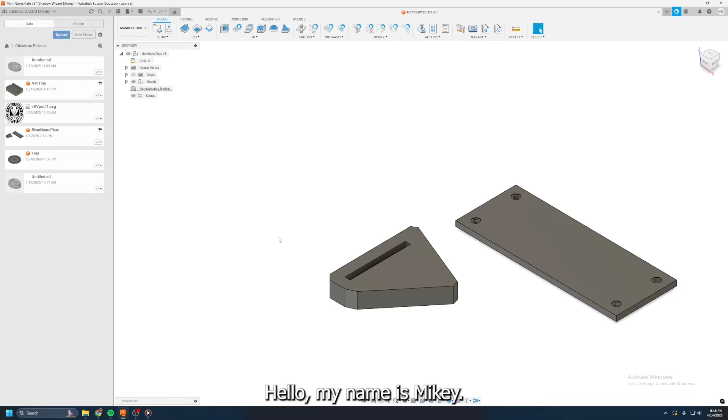I am head of manufacturing in the year 2024, and I figured it would be in the robotic team's best interest to create a comprehensive video guide on making things on the CNC within Fusion 360. This tutorial will assume you have a basic knowledge of Fusion 360 - you can speak to most people on the team if you need to learn more. Hopefully in the future we'll have other ways of using the CNC besides Fusion 360, but for now,

this is the best option. So to begin with, we are going to start with our basic model. This is a model that I made for my mom for Christmas. I never actually gave it to her, but at this point Christmas has long passed,

although some of the videos you'll see later, it is currently Christmas. This will be... you can see this is the stand that this part slides into. How it would really look like is this:

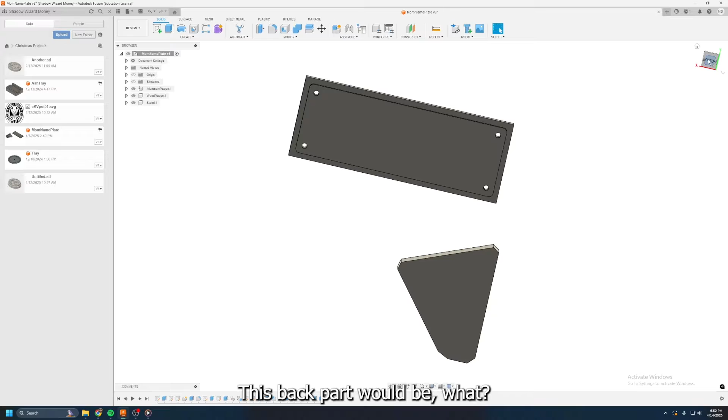this front part would be metal, this back part would be wood. For the most part, we use aluminum in the shop for the CNC, and any wood will do. This will also be wood over here as well, and it'll slide in there. I'd typically make two of these and make them mirrored, but for this tutorial, I'm just going to be doing one.

So the very first thing you have to do is from this design part up here, go down to manufacture. This opens up a new menu that you have to use to do all the manufacturing functions that you need to do. The very first thing is, if you ever see me open this up, you press S. So I'll just type in manufacturing and you'll see 'create manufacturing model'.

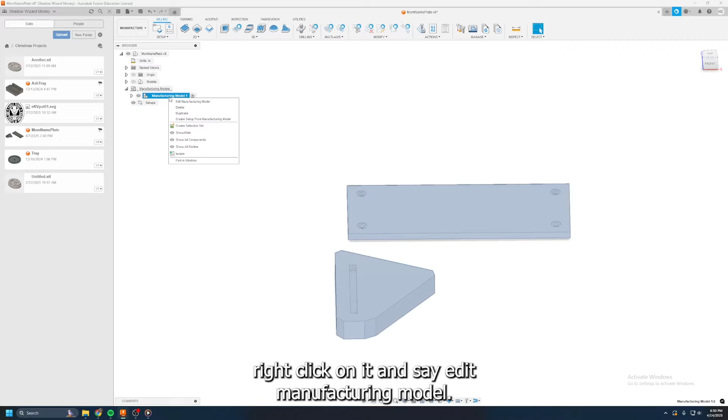So if we do that, I can right click on it and say 'edit manufacturing model'. A manufacturing model is basically just think of it like a separate model from the design one that you'd see up here - not design, manufacturing model. It is just a specific model, like a change in the model that you just use for manufacturing, although keeping the orientation for design might be easier to keep it in normal orientation.

In manufacturing, you can change the orientation, so I'll just show you what that looks like. Of course, we cannot have this metal plate under the wood and manufacture that - it's going to be really annoying if we were to do that.

So I'm just going to grab the aluminum - actually, it's on the same axis. Yeah, I'm going to grab the wood plaque, move copy, and just shift it over here and make it level. I think it's 0.25 off, or 1.25. Yeah, all right, we're good.

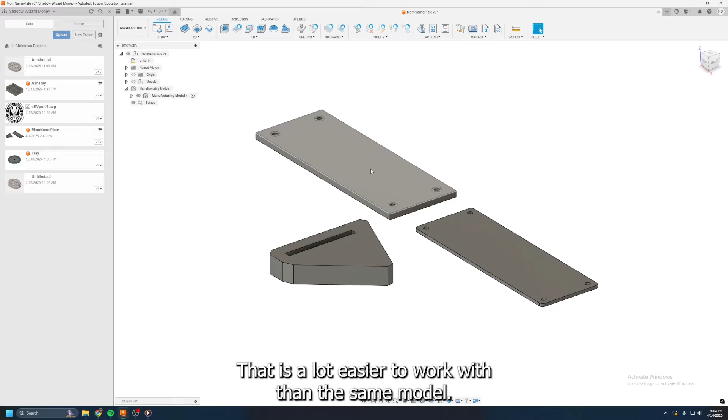So from here, now we have a finish edit. Now we have a manufacturing model that we can work with that is a lot easier to work with than the design model. Now what I'm going to be doing next is creating a setup.

A setup is basically just a set of information that we use to do functions on the CNC. This sounds very strange - just know that it's like precautionary things that we do beforehand, all right? Just click on setup and it'll bring up this menu.

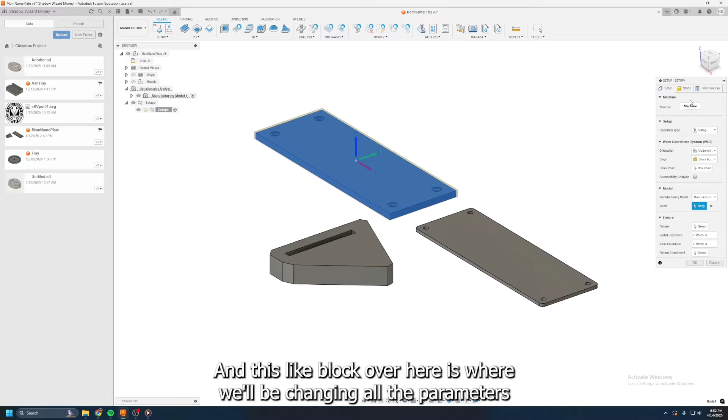Basically, this initial big square here is where it is assuming your stock to be. So what I'm just going to be doing first is this wood piece here, so I can click on model, click on that. This block over here is where we'll be changing all the parameters for the cuts - you may refer to them as cuts or mills. Same thing with the actual bits on the CNC, where I can call them a mill or a bit - they're the same thing, really.

Most of these things you can ignore, but this work coordinate system basically involves where we set our zero point to be. I just know the general way that our CNC is oriented, and we always want to have the x-axis and the y-axis on the same plane, going this way, always in one of the corners. You can kind of change the rotation of it, but it's not worth it in my opinion - let's just keep it as it is. Keep it simple, stupid. Keep it up here.

And now if we look at how this stock - again, the stock is the material that we're cutting out of - Fusion 360 is assuming that our stock is going to have this little extra bit that we want to cut off.

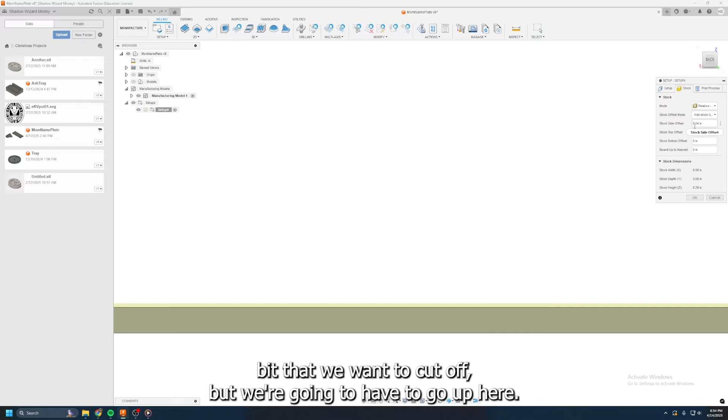But we're gonna have to go up here. I want to say no, we do not have any extra. So the stock top offset we have set to 0.0. I can set this to 25 and it will go up accordingly.

But the side offset is good at 0.04. All this really means is that once our CNC is zeroed, which you'll see later, it's just going to move 0.04 inches this way and 0.04 inches down before it actually assumes where it's cutting. It's not that big a deal. Yeah, this is all you have to do for setup.

Now that we have our setup completed, for this tutorial we're really going to be doing 3 big effects, or functions, in cutting them, in milling the stock or whatever it is.

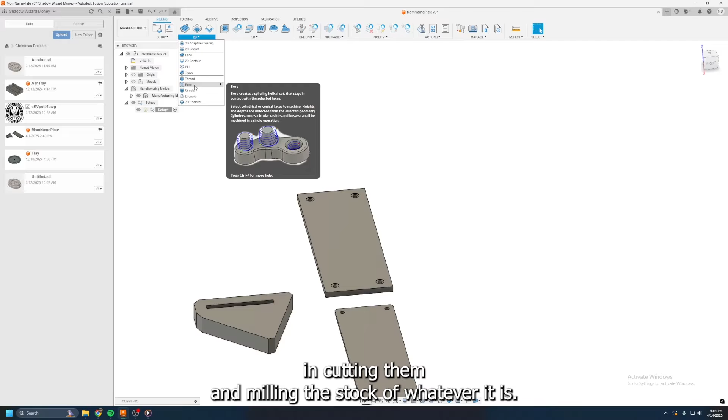The very first one is bore, and bore is almost always first, because if you imagine a piece of wood on the CNC, we need some way to secure it down to the board so that when the bit is spinning, it does not flick off pieces, like the whole thing, because there's nothing keeping it to the board. So what you typically see done is screws going up and down this way.

That's fine, but what happens if you have to go around a part that cannot be attached to any stock? Well, then you're going to have screws within this piece itself. So we always start with what is known as these holes.

As soon as you press 4, you'll see this menu open up over here. I have a document called CNC Speeds and Feeds. This is the main document I refer to whenever I'm cutting anything, which contains all of my speeds and feeds. I'll likely attach this in the description down below, but I know for plywood it's 180 inches per minute.

The feed is basically the distance that the bit is moving, versus the speed, which is how fast the bit itself is spinning. And if you don't know, RPM stands for rotations per minute. We're not going to go into detail exactly, I just want to have this up.

For right now, I'm going to do the next very important part, which is selecting our tool. So if you click on this tool, nothing will pop up because it doesn't know what's there. I have stuff in my local library, but let's just say that you are completely new to this.

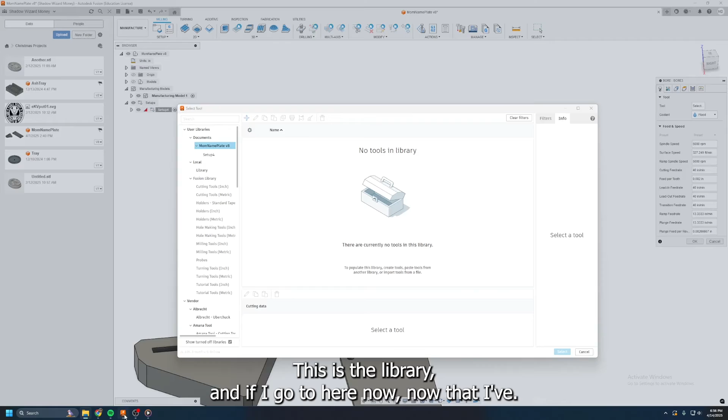I have also attached in the description below a library full of tools. So I can download this, it'll be in downloads. This is the library. If I go in here, it's basically a text file that contains information about all of the different bits, so that you do not have to manually import them yourselves. So now we can just right click on this, import tools, library tools.

Great, this is everything. This is all we're going to be using. In fact, we're really only going to be using this bit here, 4mm 50 OAL. Select that, 4mm 2 flute, 50mm. Great, making sure nothing's off.

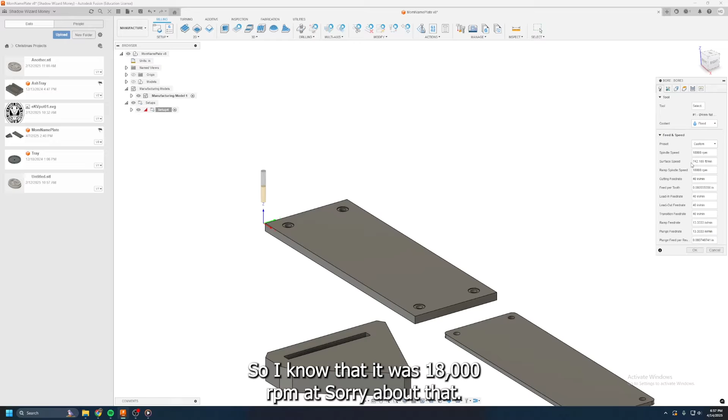Now that we have our bit selected, it'll pop down here, and we can enter in the speeds and feeds that we saw. So I know that it was 18,000 RPM at... sorry about that, for our speeds and feeds, sorry, I had to go change something.

There was nothing, I just went to check that I was not insane. Select that, that's the right tool, as I mentioned before. Looking at my speeds and feeds document, I know that this is 18,000 RPM at 180 inches per minute. Everything else will adjust accordingly. Those are really the 2 main ones that you have to enter.

Next, we can go to geometry. This is actually when we select the parts of the cut that we want to be cut. So I know that it is just going to be the circles. We can do this pretty easily.

Select that and that. This little yellow line is the path that the drill bit or mill is going to take. Select all of them. There's ways to automate it using these down here, but for the most part, I'm just going to auto select them.

Now, heights are basically just involving at what point you want it to operate.

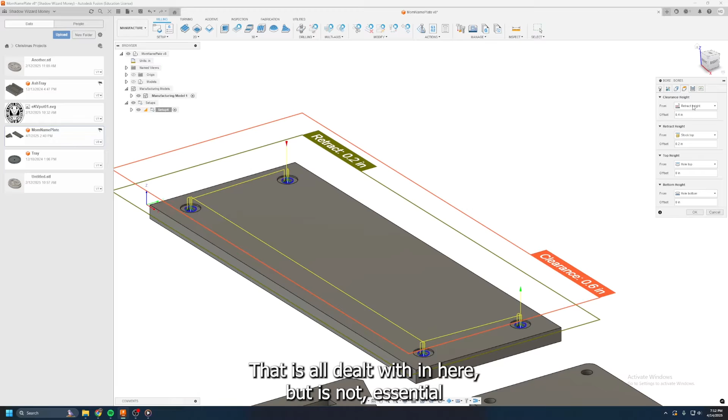When your CNC is moving, how high above the stock do you want it to go? And when it's retracting after a cut, how high does it want to go? That's all dealt with here, but it's not essential for the cut we're going to do.

For passes, we don't have to do a lot for the bore option, so we'll keep that as it is. Now that I know everything's correct, I can just go. Great, that's our first function done.

You can see the effect it has on the stock. It will automatically cut it out, you'll see. We can even simulate what that would look like if we right click and go to simulate. Here we can drag through and go through the actual path that it takes.

Next, we're going to be doing the contour. Now that we have our hole done here, we can drill the holes in to secure it, and now we're going to go around it with contour.

Just as before, we have our 4mm 2 flute, OAL 50 OAL. I can just click on the bottom. The top - do not click on the top. If you click on the top, it will cut down to the top, which means it will not cut at all. So you have to click on the bottom.

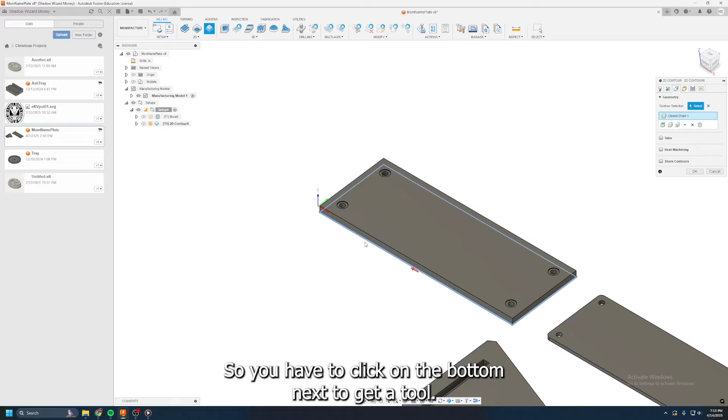Next, we go to tool. I should have done tool first, but it doesn't matter the exact order you do it in. It remembers the choices I made last time: 18,000 RPM at 180 inches per minute. That's about all I need, I don't need to change anything else.

However, I do want to go to passes. This is a very important thing called multiple depths. Think of our drill bit - it could maybe do the entire depth at once, but it's best and easiest on the bit for it not to cut the entire depth of the wood at once. So we can do multiple depths, where it will do steps downward as it's cutting.

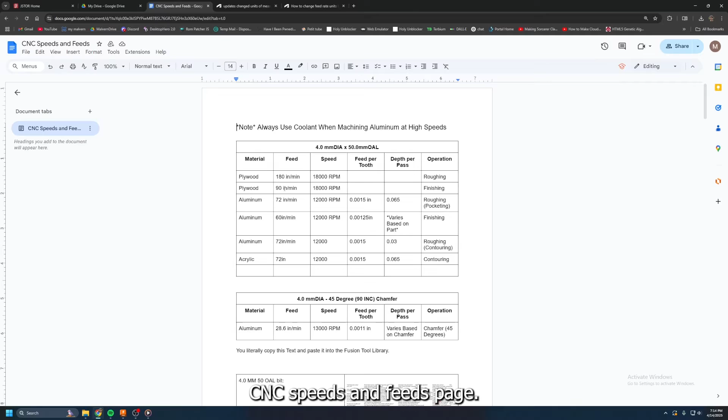So I can go back to my CNC speeds and feeds page. Our depth per pass is 0.065, which I can just type right in. Not a lot else to change here - we know what the tool is, we have the right tool, we have our right speeds, and we're good.

Look at that, you can see the different steps - the little blue lines are the steps it would take. If I select both of these, I can right click and go to simulate, and then see the entire thing from start to finish. Right around after it finishes these holes, like right there, then it would drill the material down to the bottom and then cut around. You can see how that would look.

Great, so I'm pretty confident with that piece, but that's just wood. It gets increasingly more difficult when you do anything with aluminum. If you don't know, aluminum is extremely soft, which makes it easy to work with, but that also means it has a low melting temperature.

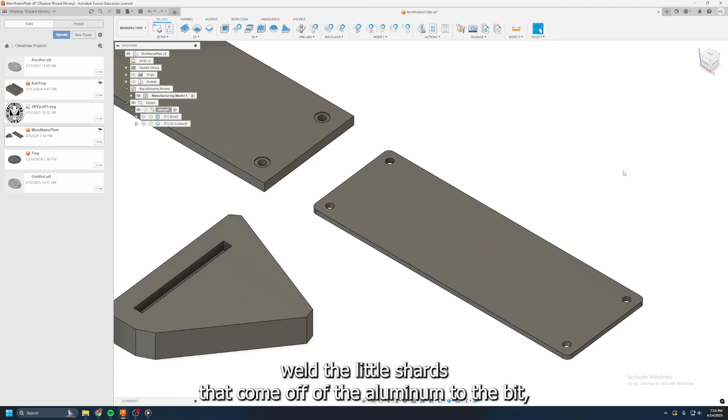So if you have something moving incredibly fast, causing a lot of friction, it will create a lot of heat, and it will effectively weld the little shards that come off the aluminum to the bit, which puts a lot of strain on it and breaks it many times. There are many other precautions you have to take to prevent this, especially on the CNC, mainly regarding where you zero. You don't want to zero too low down, or too high, and you'll see what that looks like.

You also want to have the sprayer on. There is a way to do a sprayer setup in Fusion 360 that we don't really use. I'm just going to do the exact same thing as last time, where you go to setup. It will automatically select that because it assumes I'm continuing with that, but I'm going to say no, I'm going to work with this. And then go to stock, and then relative size box.

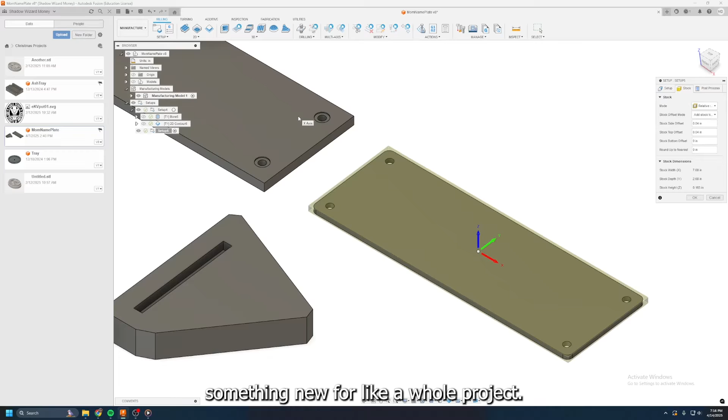It will default to relative size box when you're clicking on something new for a whole project, but if you're doing something specific, like going from this model to this model, you're going to have to reset it to relative size box.

I know that I want 0 top offset, because I know that where I want to zero it, I do not want to be any higher than where I want it actually to be zeroed. Great, I'm going to put my 0 point up here.

We're looking good. So from here, we're going to do the same thing that we did last time with a bore. I'm going to start off by selecting my different holes. And I know, just off the top of my head, I know that I have to go at 12,000 RPM.

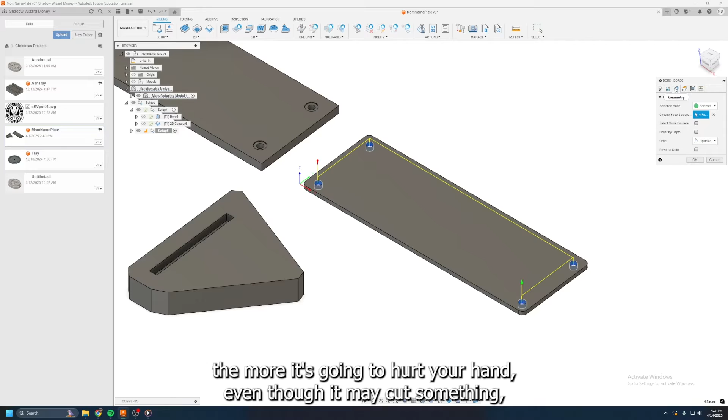Yeah, 12,000 RPM at 72 inches per minute. So it is much slower on aluminum because it is harder. You don't want to speed up on something that's harder. Sounds kind of counterintuitive, but it's just how it is. I think if the harder you press down on like a knife, the more it's going to hurt your hand, even though it may cut something, you know? That was probably not a great analogy.

Just go with it. Passes, we're not going to change this at all. And that's our bore done.

Now we're going to go to contour again. Select the bottom face as always. If you don't know, this little arrow in here dictates if we're going to be cutting on the inside or outside of a contour. We're going to be cutting on the outside. I've had to adjust that a few times, and it's happened in the past.

We're going to go to this. It automatically knows our speeds and feeds because I just entered it the last time. But in regards to passes, multiple depths are imperative.

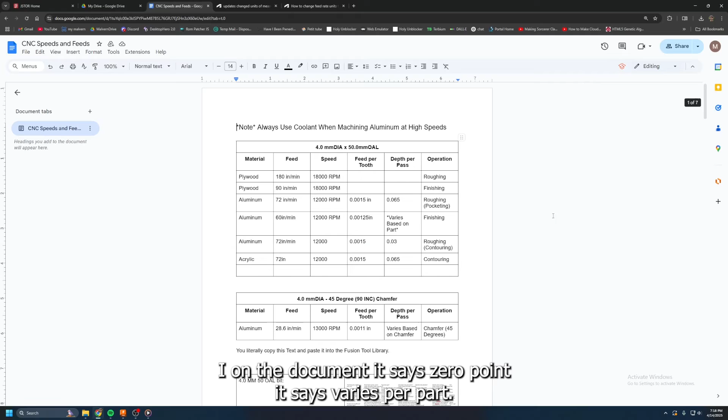On the document, it says 0. It says varies per part. I'm going to tell you that most of the time I've had the most success with 0.03. It is going to be very small, but it's going to be successful. And that's really all we can ask for.

In case I haven't explained this, the step downs are just how big the jumps are from height to height. So the distance from here to here, that is the step down. I mean, this looks like a pretty solid part so far.

So aluminum, we will get into a lot more later. Now we're going to go to our last little part here. We're going to be dealing with adaptive clearing, where in order to utilize it, the best way to do it is to select the very bottom.

You'll see it has pocket. Like I can even do contour, and that'll also, or chain, I guess you call them, but whatever. Select the very bottom. I'm going to go to tool.

I know that I'm going to be going back to the wood speeds and feeds. So that's 18,000, should be at 180 inches per minute.

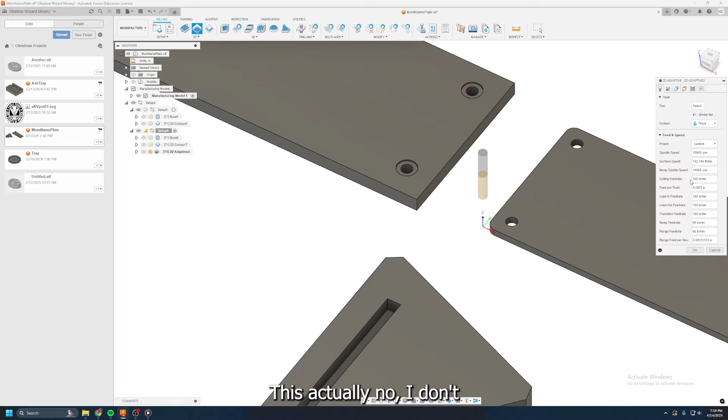Actually no, I don't deal with tabs yet, but this part is quite simple. There's not a lot of change with this.

Oh wait, no, I did not create a new setup. So it will do that if you do not create a new setup, and it will be unusable.

But I'm just going to speed through this. Our top offset is 0.0 with our 0 point set at the top corner. Now we do adaptive clearing.

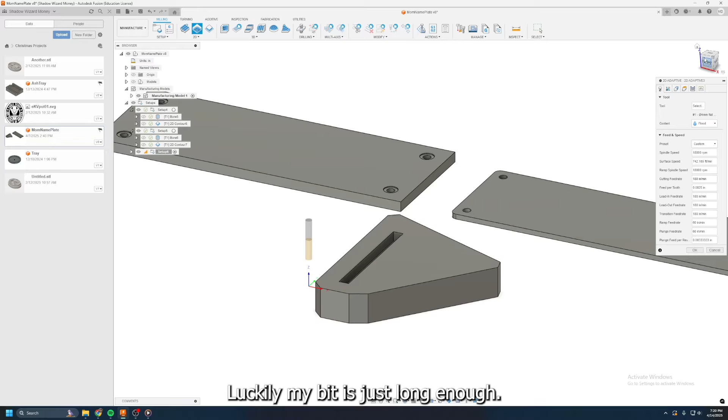Guess you'll be able to see it again. Select the bottom at 1800, at 18,000, at 180, and we're going to be keeping our bit. But for these thicker pieces like we would have here, typically we would use a longer bit. Luckily my bit is just long enough, but the 4mm bit is just long enough.

I would typically use a 75mm bit, and if you just think of leverage, if there's a longer shaft, it's going to mean that you cannot press as hard on it without it breaking. So that would mean that I would just go a lower depth of cut, or I don't want that on, but that may just turn on at random times.

I'd want a lower maximum roughing step down, but because it's the normal bit, I'm just going to go 0.065. If you don't know, because it is a circular bit, you will not be able to get perfect corners like this if they're not on the outside. I would typically just take a file to this, or I'd cut it out with a knife.

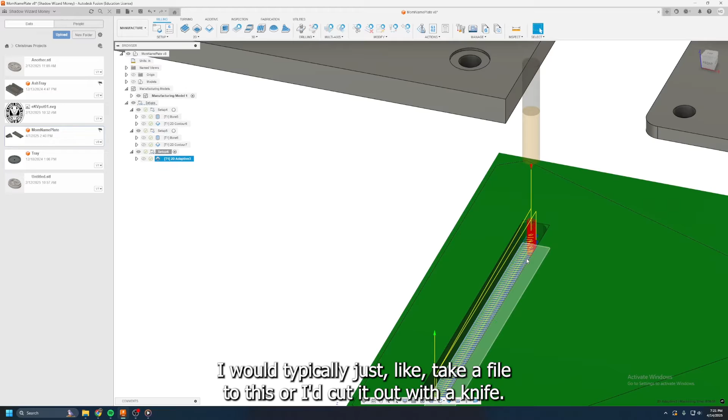Doesn't really matter, but you can see the multiple layers, and I'm just going to, sorry, ran out of disk space.

Basically, all I was going to show you was that the corners were too tight, as you can see down here. It's too tight for a round drill bit to get the exact corner. So likely I will just go down and file or sand that down, or cut it with a knife or something to get that little corner. But that's what it looks like under the simulation.

And we're going to go to contour, and this is once more just a little wood piece. So select the bottom contour, and our speeds and feeds are right. But something I will talk about is tabs. Tabs are, you can see them here, little rectangular things to hold the piece in because this piece is not going to have any screws in it. We have to have some other way to keep the piece from being flung off, and this is going to be the tabs. Because the greater piece of stock is going to be secured down to the board, as long as these tabs are here that secure this piece to the stock, we should be fine. You'll see what that looks like later.

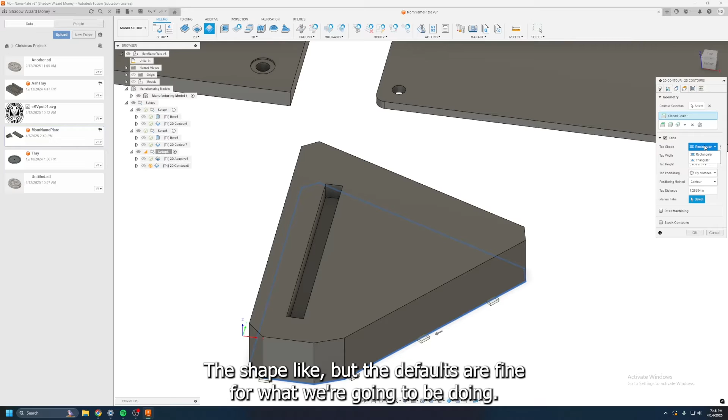You can change some of the parameters, such as what they're shaped like, but the defaults are fine for what we're going to be doing. Oh, I meant to change the depth of cut. Depth of cut, 0.065, and I think that's good. So that is the main functions that we kind of need to do.

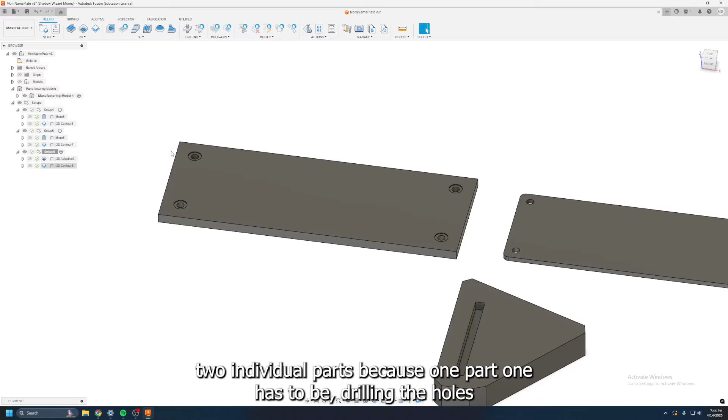Besides that, all I can really show you is, what was I going to show you? I was going to show you some little nuances, like in case you want to select what it looks like, you can click that over there. But I'm going to just show you how to export these pieces. I'm just going to be doing, because these two parts would be done together, I'll select these a little bit later, but for right now we're going to be doing two individual parts, because part one has to be drilling the holes through them so that we can secure the screws with a pause in the middle. If we don't have the pause, then it will go straight to cutting the outside, and that was all for naught. So I'm just going to right click, and we can click on post process, and that'll bring this up.

So right now I'm just going to be, I will have the post in the description as well, but basically all you do is click on folder, and you select the, I guess, G-code compiler. I don't really know the term for it, but that's all there really is to it.

I almost always name my cuts. It would be like the material it's made out of, so this would be wood, and then I just go straight to plaque, and I do 1 for part 1 of 2.

This, in all of its glory, is the CNC machine. Up here, you'll see this is going to be our central command area, but for now, we're just going to be taking the USB drive. And I'm going to select the output folder in which we would put it on the USB drive. This is a USB drive that I have at my house, and it's not the actual one that I use for the CNC. I'm just going to select it anyway, and comment.

You don't have to do any of that. Just click on post, and as you can see, I can click on this. It's in here, but there's a lot of other stuff in there. Yeah, we can do this for the big part as well. I'm just going to select both of these, just like we did for simulate. Go to post process, wood, stand, 1. And it's just going to be 1. That's all there is to it.

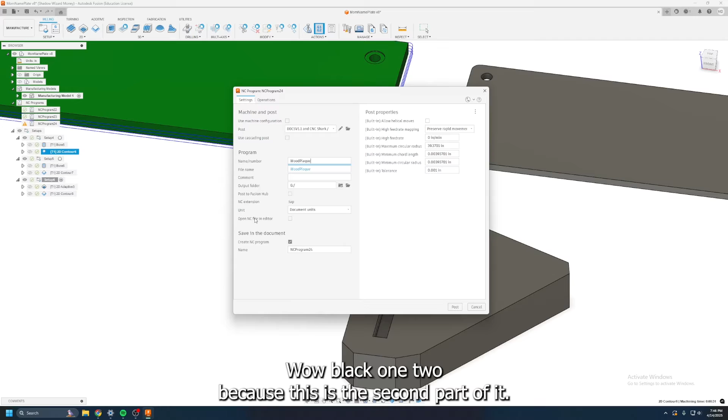Post. Oh, I immediately forgot to do the second part of this. So wood, plaque, 1. Or 2, because this is the second part of it. And then aluminum follows a similar pattern. It's post process, al for aluminum, plaque, 1, post process, al, plaque, 2.

Great. Everything else will be done later, and you'll see all of that in person.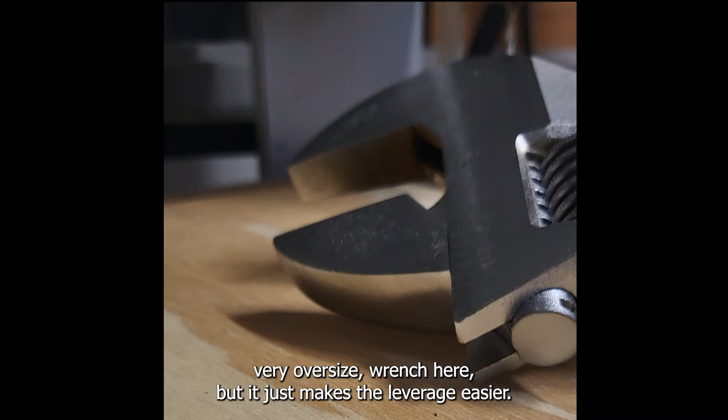Alright, so significant time has passed since our last part of this video, but I will now be changing the bit. As you can see, of course I've changed the bit a lot in between those two points, but I feel like right now it's good to redo this. So I do have a very oversized wrench here, but it just makes the leverage easier.

So you just grab it like that, twist, it'll pop, and you can just unspin it. Once it's out, you can just pull it out if the bit is long enough. I do not recommend pulling it out that way, but I guess I did that.

Otherwise, you would have it like this, shove it out, and then do not grab this length of the cut part. That will hurt. Grab the part that's not.

I'm going to be changing this out for a shorter bit. So this is 50 OAL versus 75 OAL, or overall length. You can see that difference.

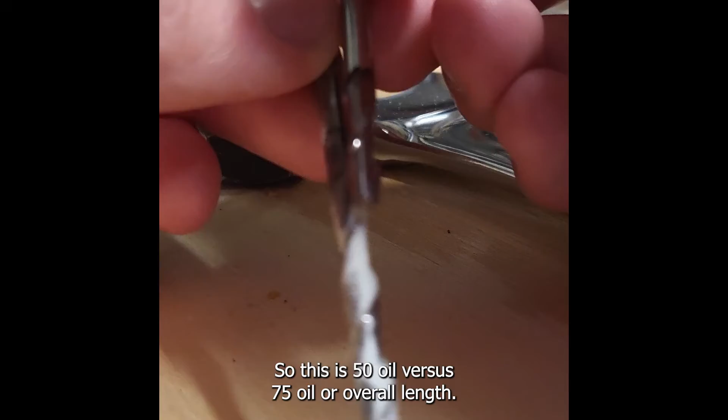Just going to slide that in there. Tap it down until you can see that little marking. I don't know if you can see that well in this light, but there's a change in where the special treated part comes in. Here, let's see if I can get that in better light. See, right around there. That's where you want to push it to, unless you need just a little bit of extra length, in which going a little longer will not hurt.

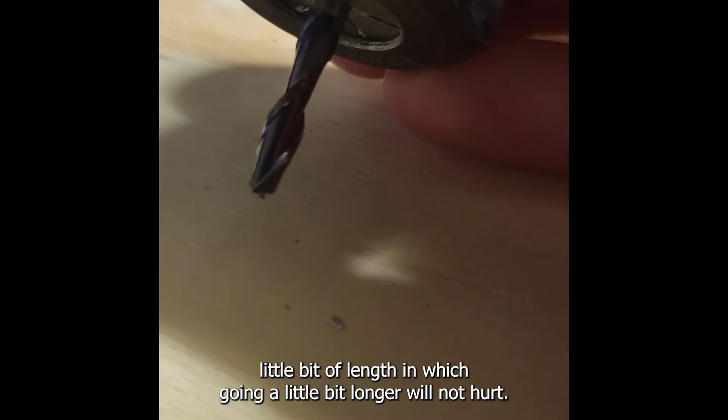Now you just slide that on, start twisting, put this back on, this back on. Make sure to make it tight, but not too tight that you won't be able to get it off again. If you make it too loose, it will come off when you are running the machine, which is really not good. Alright, I am also redoing this part, so apologies.

This is a 1/4 inch ply. I would have liked to have better wood, but this will do for now. All I'm going to be doing is grabbing a screwdriver, and with wood, you can just go right through. Now, I know I'm not going to be using this whole board, so you'll see me just use portions.

I'm just going to be using this little section here, because right here there's the blemishes, but over here it's fairly clean. I didn't do it too specific, just a general square. I know my part will only be about that big, so it didn't really matter how big, as long as this was bigger, that's fine.

If you are doing a bigger piece, you'd want to go to the very edge of the board. With that, this center part might warp upwards, so you want to make sure that if you put a screw in the center to keep it from puffing up, your cut will not go through the screw, which I'll explain more later in the PowerPoint section.

Now I'm going to be repeating this step quite a few times. We're just going to be zeroing the machine. So that's the bit right there.

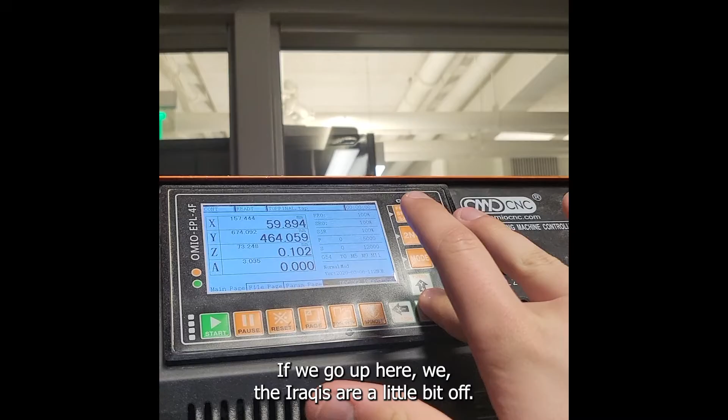If we go up here, the arrow keys are a little bit off, where down moves it this way, left moves it to the right, right moves it to the left, and up moves it backwards that way. So using those directions, we're just going to bring it over.

Going to get it generally in the corner, then shift it. This button shifts it down, this button shifts it up. You can see, go down, that's a little bit tight, down, down. You can see we're nearly touching.

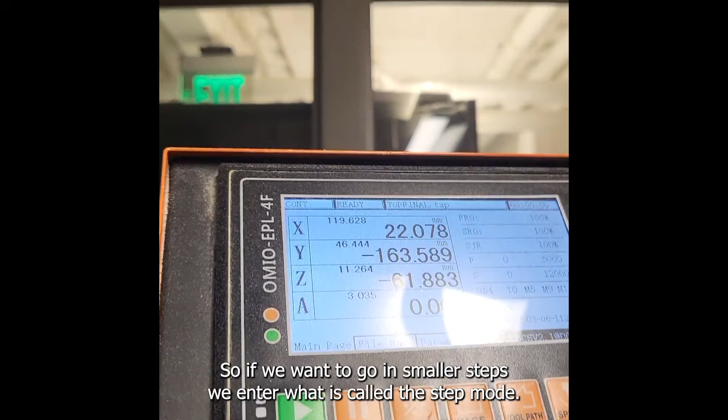So if we want to go in smaller steps, we enter what is called the step mode. Right now you can see it says cont, for continuous. If we press the mode button here, that will shift to step. You can see how big the steps are that it goes down, which is 0.01 millimeters. That's really small, and we're going to be here for a while if we just continue to press it down, which we can if we want really precise measurements.

But you can see it's still spinning freely, which means it's not touching the wood. So to shift that, if we press this button here, you can see the bolded number goes down to SJR. I don't really know what that stands for. Make that 0.1, and then you'll see actual changes to how much it spins.

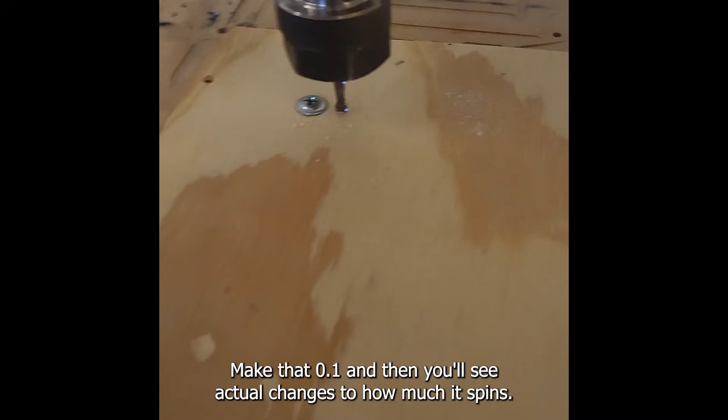I'm just going to press the down button just like before. Down, you can see that little shift, still spinning freely. Down, down, still spinning freely. Down, and I think that'll be it. No, one more. Yeah, there we go. That's just about zeroed.

Now, to actually zero the machine, so it knows where its zero is, where to go from, press the all zero button right here. That's what I did, sorry that was off screen.

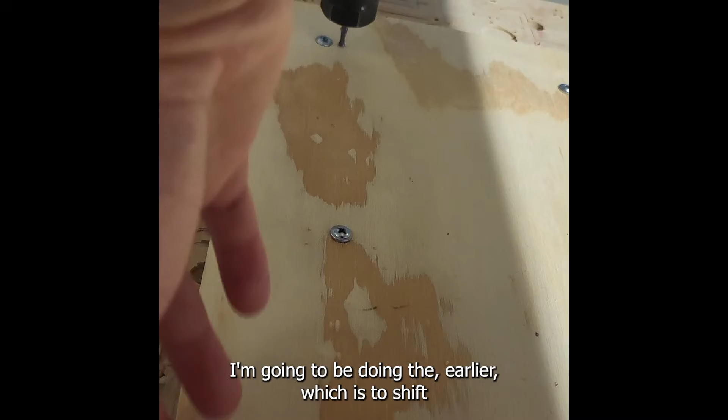Now that that's done, to actually start the cut, I'm realizing you can see that this bit is right in the line of this screw. So what we could do is either re-zero it and make the 0 this way, or we can move the screw. I'm going to shift it.

Just like before, going to go to mode. Also there's one more in-between step. I don't really know what MPG is, I believe it's for the 4th axis, but we don't need it. We can just go to continuous.

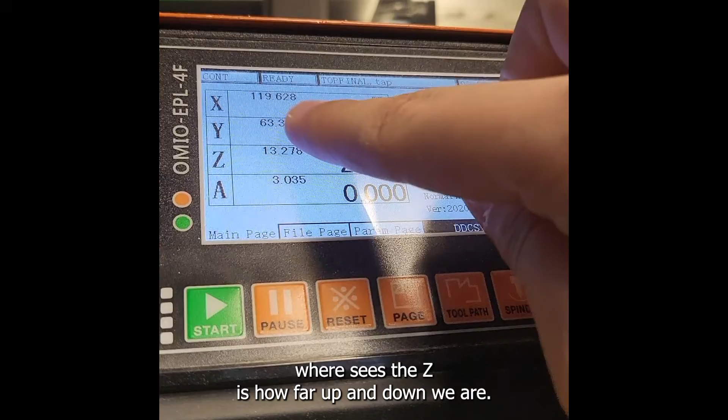If we go up, back, I can just go based off of this, where the Z is how far up and down we are. So I can press this until switch back to step. Once this reaches 0, I know I'm at the same exact Z level as before. So now it is no longer in line, and it's just barely touching and slowed down by it. You can see a little circle forming when you know you're at the right 0. Now we're all zero, press page.

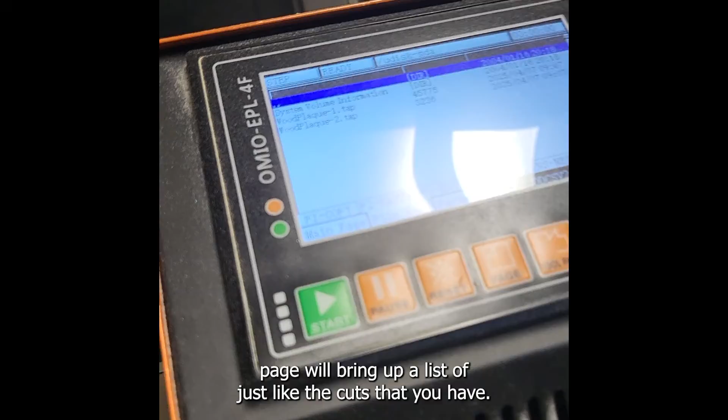I'm going to close these doors. Page will bring up a list of the cuts that you have. I just have wood plaque and wood plaque 2 on it right now. I named 1 for the very first cut and 2 for the very second cut. Press these keys to go down to wood plaque 1. If we start, you can see it cutting. All right, I'll see you later.

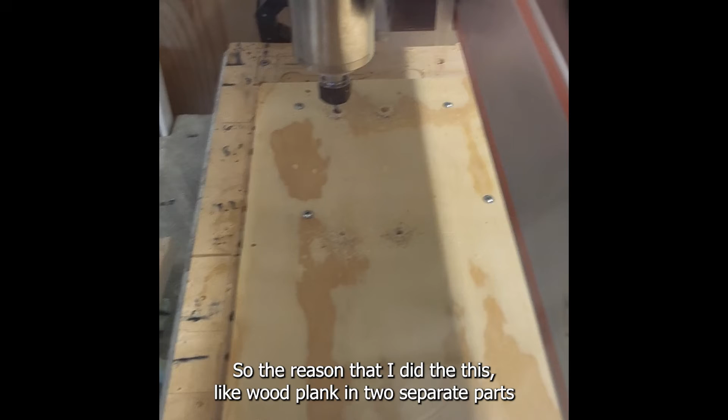The reason I did this wood plaque in 2 separate parts is that if we go around the little holes that we have right now, the part would chip out as it was cutting, which is not good because there's nothing holding it to the base plate. So using the holes we just drilled, we're going to drill more screws in it so that when we go around, it will stay right where it is.

Pop this open, and using the same exact buttons from before, I can safely go to continuous, move it out of our way. Make sure not to de-zero it, because then that'll mean we basically have to restart. Alright, just blow that off. See, nicely drilled holes. This may be going a little bit overkill, but drilled holes for a reason.

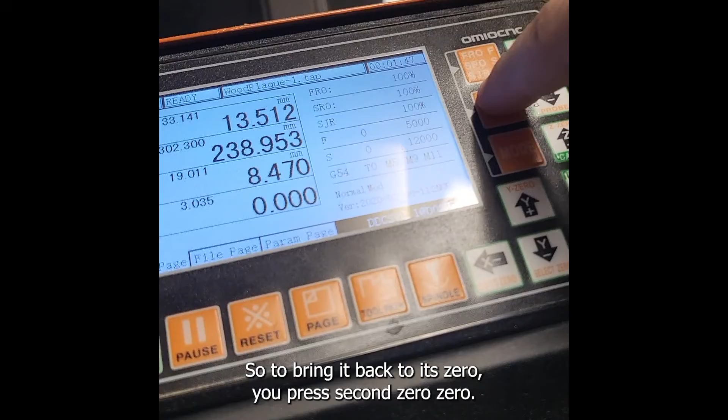Now we can start the next part. Close this up. So to bring it back to its 0, you press second 0, 0 - sorry, X minus, but that's just what I say to myself. Now shift over, just like we did before. Page down, we're going to be going to wood plaque 2 for the second cut.

Start. With time, you'll come to hear what a good cut sounds like. This is fine. Wood is quite hard to break a bit on, and it's not exactly screeching in everybody's ears. I'll see you in a minute.

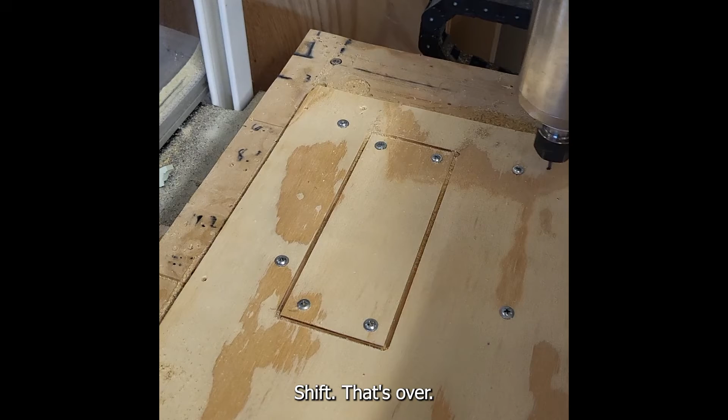All right, now our cut is finished. Just as we've done the previous 2 times, shift this over and remove the screws. So what happened is we did not go deep enough with our cut, which means you can see we're not seeing the base plate there. We're just seeing the wood continued.

So what we can do about this is either redo that cut and go lower, or, because this part is wood, I'm just going to take a little saw and go through it. Alright, so this is our part, it's pretty basic. I'm going to sand that off. I would normally not cut it out like I did if it was a metal piece, but because this is just a wood piece for a tutorial, it's nothing big.

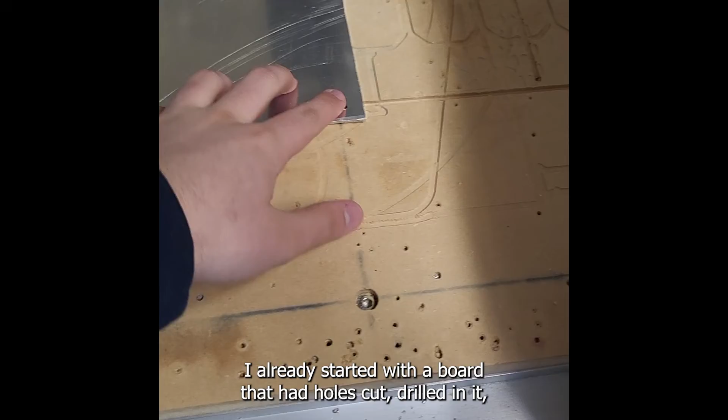Alright, so getting started with our aluminum piece, I already started with a board that had holes drilled in it, but you will need 2 drills here, one for drilling the holes in the aluminum and the other for screwing in the screws. I also will show you a quick thing on Fusion 360. This is, as I mentioned, warping beforehand. There is a workaround that I've found to be incredibly useful.

I'm just going to be going to the aluminum, the bore in the aluminum. There is a section called heights. If you go to heights, there is a bottom height, and you see I made the offset 0.35.

You'll see why I did that later, but the basic idea is that with the warping board, a consistent way to always cut the same amount of aluminum and not break a bit is to set your bit's zero a little higher than where the actual corner is. This means that even if a part is warped upwards, you will not be cutting anything, and when you actually do cut the part that is warped upwards, you will only cut a small amount, not enough to break the bit, which definitely helps and is how I've gotten through this robotics season.

And now we're just going to continue drilling the holes into our aluminum.

Okay, now that we have that, I'm going to show you exactly how I zero it. Of course this is not too big of a piece, so the likelihood of it being warped is a lot less, but I will show you.

I'm just going to set my dummy zero point of where it would be right about here. Set that just about where I want, zero that. But what I will do is continue to drag the bit along this way.

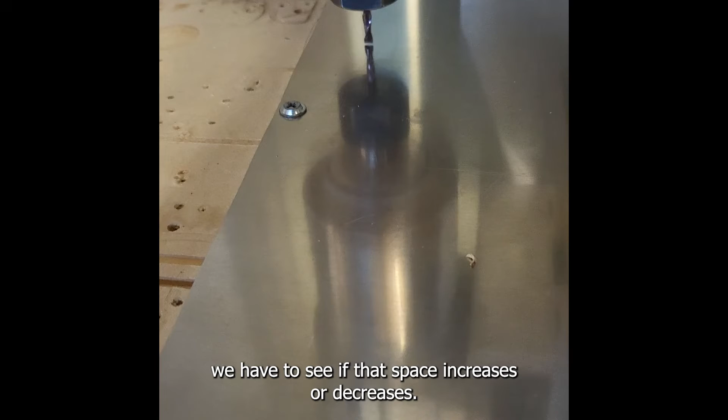You can see there's a little bit of space. We have to see if that space increases or decreases. Luckily it didn't. I'll shift over here, right to the center where it is most prominent. Got a little bit close, but none of it is any worse than the position we originally had.

So I'm going to reset, go back to our zero. I'll say right around here, swap between mode and step, and go down, right there, up there, one more up. Great. Now I'm going to go put the files on the flash drive and we'll get back.

Alright, so I'm going to re-explain this. A major part of cutting aluminum is keeping the bit cool. If the bit heats up to the melting point, or makes the aluminum malleable when it is cutting, what will happen is the aluminum will end up sticking to the bit.

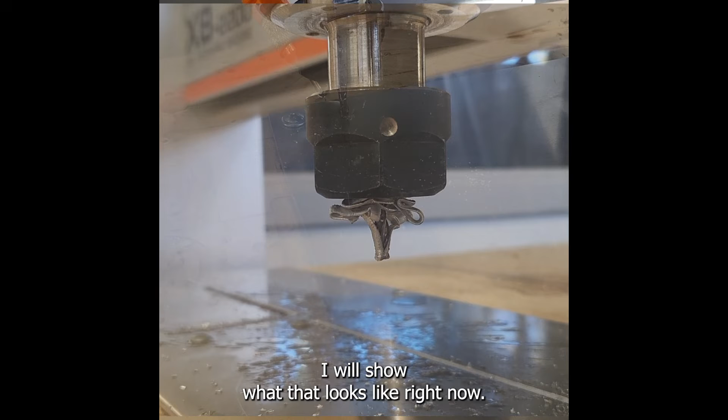I will show what that looks like right now, I have a little video of me attempting this earlier and messing it up. Yeah, so that's not good, and as you can see, the sprayer is already kind of leaking. We use a sprayer from this alcohol up here, which drips down into the sprayer here.

Thank you to Neil for designing this. This right here adjusts how much is coming out. The tighter you go this way, the less that will drip out. And as you can see, it's already stopped. I'm going to leave it like this for right now as we're setting this up.

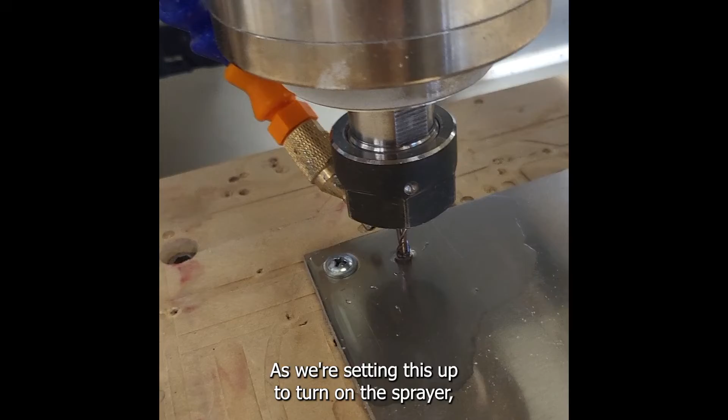To turn on the sprayer, to turn on the actual air that is coming out, come over here, this little thing here. Why is it not plugged in? Great, plug it in. Great, plugged in. Turn that on, you can feel the air coming out. Eventually you'll see this area of dryness.

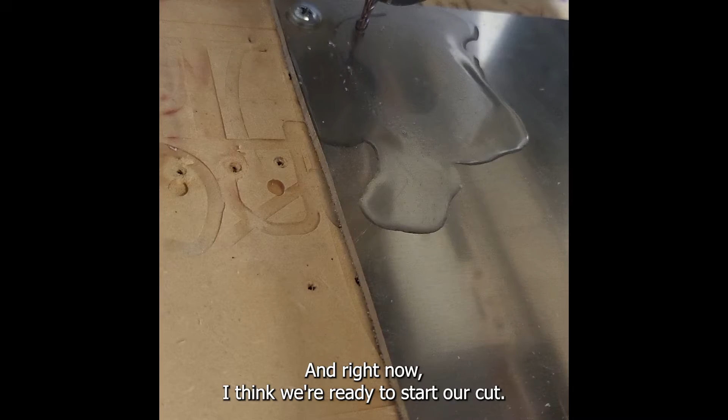And right now I think we're ready to start our cut. So because the holes do not generate a whole lot of heat, I'm going to turn this up just so I can start seeing those little droplets forming. There. You can see this little part here, if you turn that all the way in, that kind of locks its position. So now we're ready to start.

Close this up. Page. I'm going to be going down. Where is my files? Hold on.

This just happens sometimes, and I don't know why. There's no real way around it. This is like quite old.

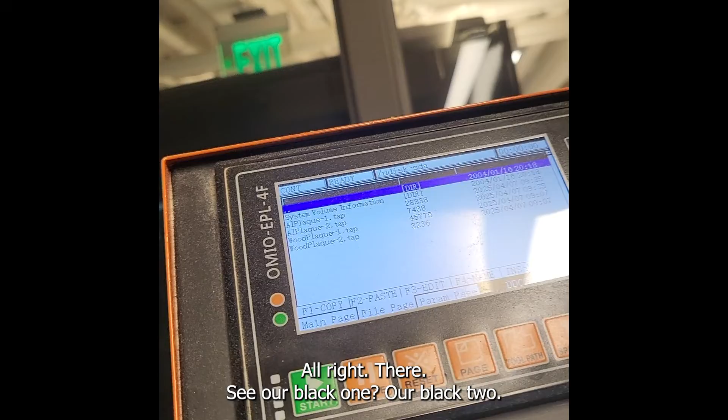All right, there. See, AlPlaque-1, AlPlaque-2. I'm going to select AlPlaque-1. I'm not going to hit start yet. Now I'm going to turn back on the sprayer. Great, and start. See you in a bit.

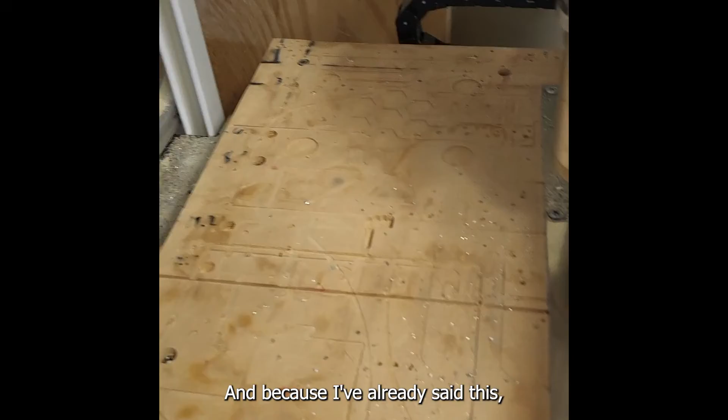All right, so that went great. The first thing you want to do, I already turned it off, is the sprayer, and then to prevent it from leaking any more, slide this right up here. And because I've already said this, if a lot of alcohol gets on the board, that will lead to warping, which will only break bits.

Just like we did before, shift this out of the way, and we can once again start drilling our holes. I'll skip over that. Now, as we did before, set zero-zero, going to be going over. Alright, slide our sprayer back on.

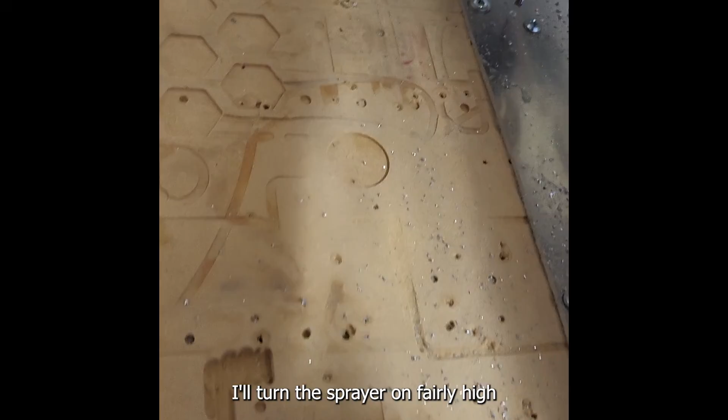So contouring around the bit, going around the actual part, generates a lot of heat because it's traveling very fast. I'll turn the sprayer on fairly high and the air on to see what that looks like. A lot of knowing when the bit is going to break is actually sound, so a lot of these things are hard to describe and are mostly experience.

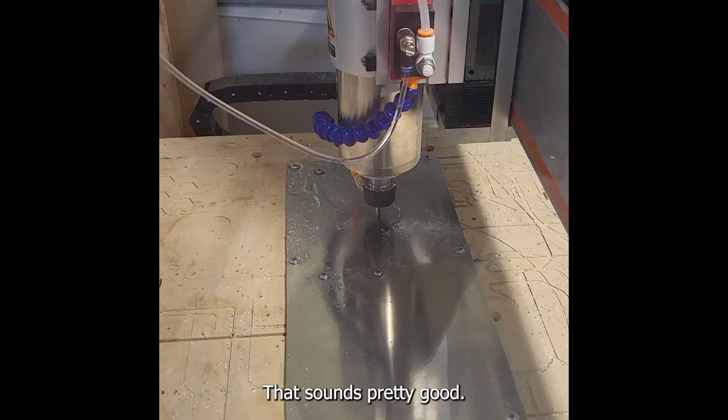There, now it's coming through. I'm going to turn that— actually, I think that's good. Yeah, let's just send that. Close that up. That sounds pretty good, just like one constant sound is always good. Look at that.

Alright, so our piece is finished, and I've already removed the sprayer. Shift this out of the way, and we'll see how good this looks. Looks pretty good from here.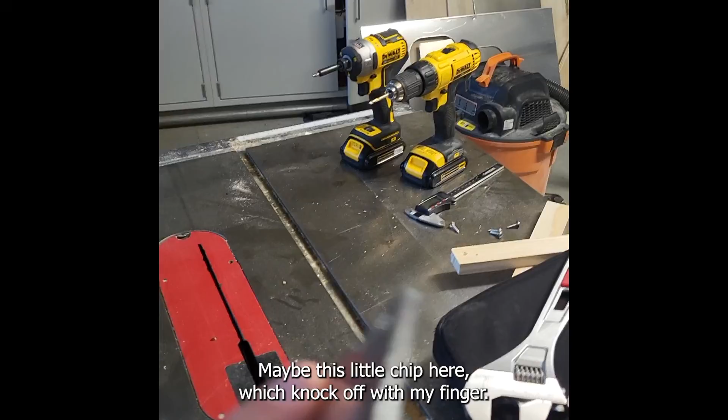Alright, so our piece came out, and I don't really have any complaints with it. Maybe this little chip here, which I can knock off with my finger. Yeah, looked great for a first aluminum piece—I'd say this is fairly simple.

I've done most of the pieces that I've cut for the robotics season go throughout this entire size of the table, so it will get progressively more difficult. But for now, I'd say that's a pretty good starting project.

So this is what the two parts put together look like. That's kind of a testament to the accuracy—the parts slid right in, no real hassle. Alright, so for our final piece, I was going to go ahead and zero it, and then I realized I should probably address this.

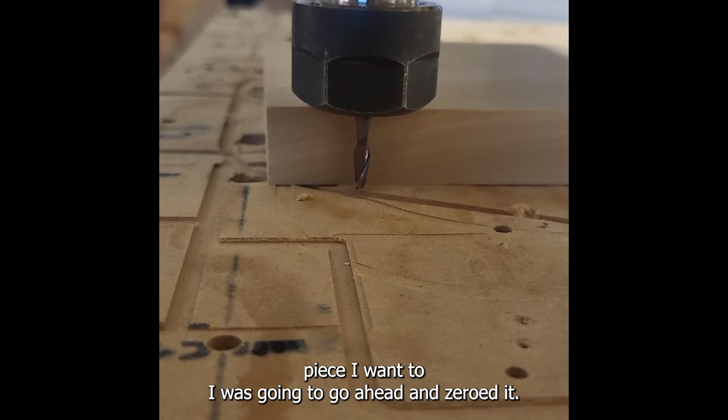If you have a piece of stock that is too big, your drill bit won't be able to reach the bottom of the stock without the upper gantry hitting it. Luckily, this one is just barely above it.

But for the future, you can either use longer bits, which requires a smaller depth of cut, or you can just, as I will do, bring it up, push it out a little bit, and put it back in. So I got the gantry out—what I'm going to do is put that in there and shove it out a little bit.

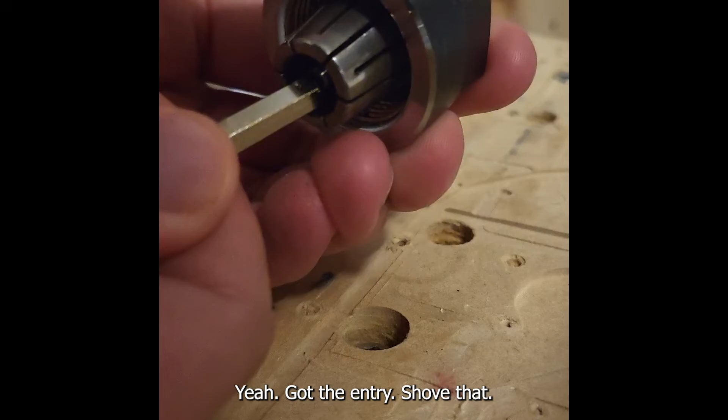Maybe I need something a little bit tighter. Here, got the gantry—shove that. It should come out a little bit, and that should be more than enough. You can see, put that up against there—that is able to touch with plenty of room at the very bottom of the stock. So we can just use this bit.

Alright, so I have now loaded up the flash drive, and I've zeroed at the very top of our stock, but there's literally just about nothing else to change between this and the little wooden part we had before. Running this should give us everything that we want.

There's not a giant difference between using thin and thick stock besides using a different sized bit. If you have a longer bit, that just means there's going to be more leverage on the bit constantly pushing on it, so you'll want a lower depth of cut. Just keep that in mind.

I've done very deep cuts where I've had to do 7 or 8 different rotations of the stock. That is when you should have a longer bit, but it can also be detrimental, because I've also broken many bits this way. Now let's just start.

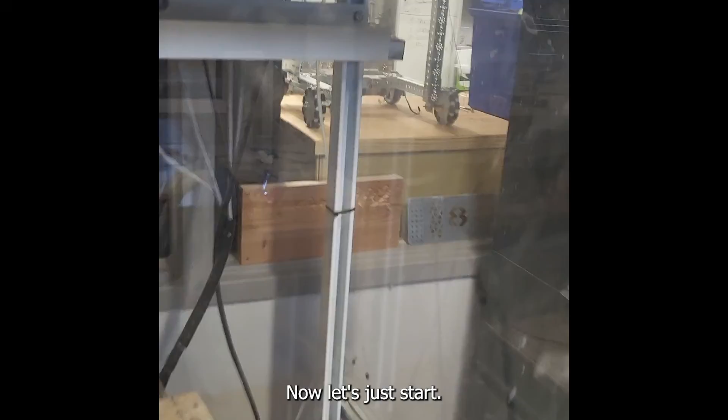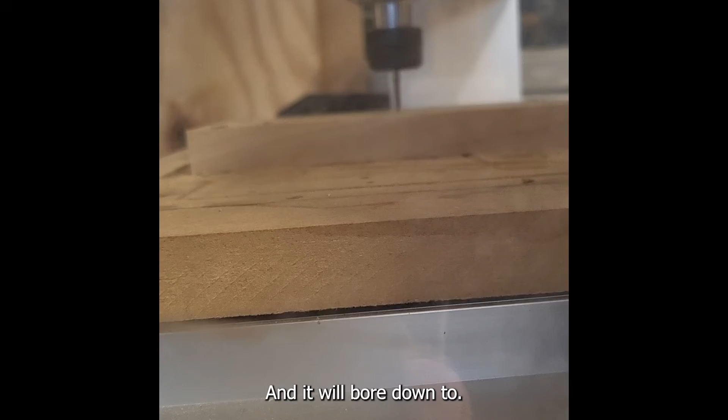Alright, now we have our part made. I do need 2 of them, so I'm going to do the same thing but shift it over. This is as simple as just moving the bit to here and zeroing it once more.

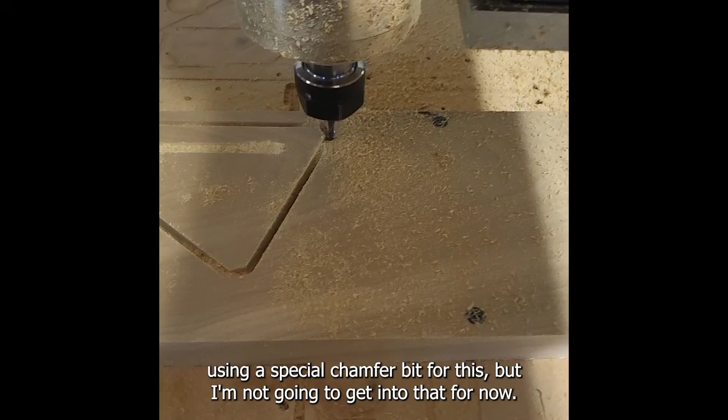This is really the process you're going to have to get down for CNC machining: prepare your stock, screw it down, make your zero, start the cut, make sure everything is processed—either washed off, sanded, or filed. If you really want to get good at it, you can chamfer the edges using a special chamfer bit, but I'm not going to get into that for now. I'm simply just going to make another piece.

Alright, got our pieces. I'm just going to undrill it. Actually, you know what, let me move this first.

Alright, so I forgot to record removing the tabs, but the idea was just that you clip them off and sand them down. There's not too much to that, but I would just like to say that this is the final project I'll be doing for today.

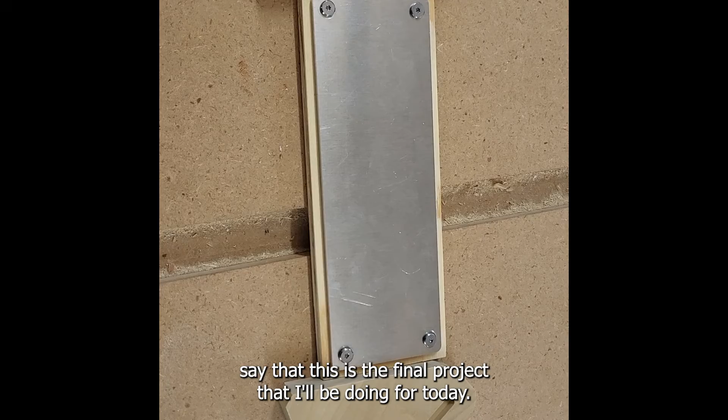All this, of course, isn't perfect. First off, these parts I should have mirrored because they're going to be on opposite sides, and it doesn't really work that way. But see, it would look like that.

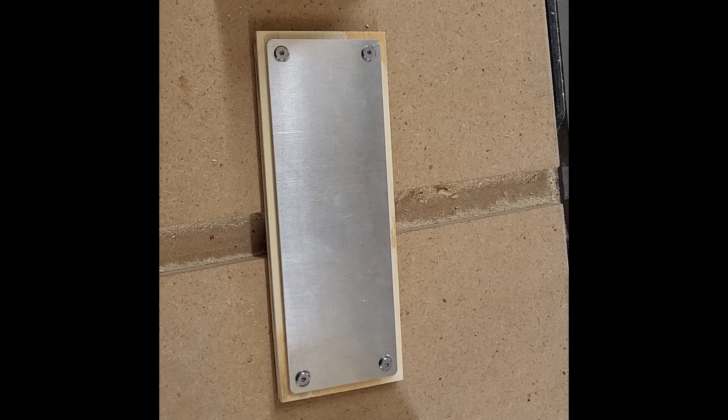I think this was a great project to demonstrate the different types of machining you'd likely be doing on the CNC. There will be bigger projects that will require more time, and warping will become more prevalent. But yeah, I'm happy to leave you guys off here and have you try it yourself.

I'm just going to be going over the problems that I've faced in my times of CNC machining and trying to prevent them from happening to you.

First off, the problems with the CNC can be really dangerous. 70% alcohol can still catch fire, so don't have flames around the CNC. If you break bits, which are hot and sharp, they can get flung when broken, so watch yourself. Be prepared to turn off the machine quickly.

If something goes wrong with the machine, it's making a noise you don't like, or something's not good, just hit the emergency stop—it's the big red button that you twist. Just hit it and watch the machine.

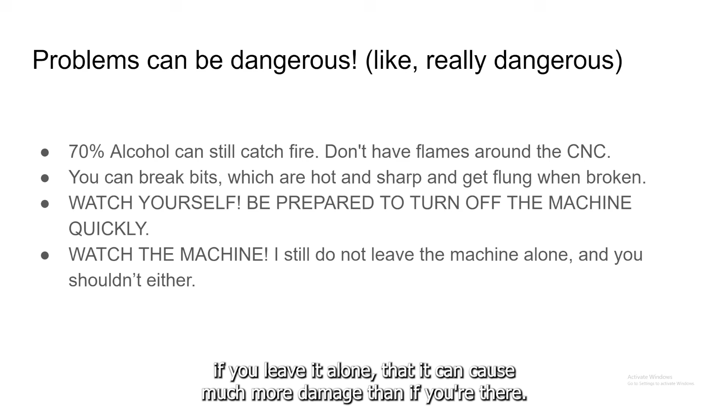So don't leave the machine. I still don't—you have to be really confident. There could be some hard part in the piece of wood that you cannot see, and that's what breaks the bit. If you leave it alone, it can cause much more damage than if you're there. It is hard to break a bit on wood, but it is possible.

So for wood, it's kind of looser, so I would just recommend following the speeds and feeds I have, because they're almost universally applicable for wood. But just like aluminum, it's perfectly fine to turn down the depth of cut without any danger.

For longer bits versus a shorter bit, it is best, if you can, to have a short bit. A longer bit means there's a lot more leverage on the tip of the bit—the bigger the lever, the easier it is to pull down and the more energy you'll get out of it. Short bits are much harder to break. For longer bits, only use them if you have to reach somewhere you can't really reach otherwise.

Get to know your diameters, and that also includes the metric system. The main drill bit size that I use is 4 millimeters—it's kind of like a jack-of-all-trades size. I had relatively no actual need to change the bit.

If you're going to be doing something with very small details, it's likely something you can't really do on the CNC to begin with. And if you turn down that diameter even further, that just increases the chance of breaking a bit.

Get to know your thickness too. This one's very simple—if you have 1/4 inch versus 1/2 inch, that's really the main thing. If you put in that your piece is 1/2 inch when it's really 1/4 inch into Fusion 360, it will drill 1/4 inch into the plywood, which isn't good. I know this sounds very obvious, but it really affects you more than you think.

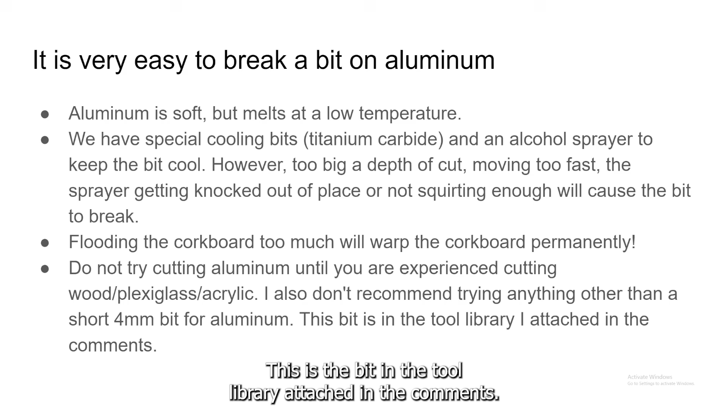But just generally, I would avoid cutting aluminum until you're experienced cutting wood, plexiglass, and or acrylic. I don't recommend trying anything other than the short 4 millimeter bit. I said short, but it's 50 millimeter, it's 50 OAL. This is the bit in the tool library attached in the comments. All of the tools I showed you are going to have a link to a Google Drive where it's just a quick import.

So this is a little demonstration, I guess, a little graphic about what happens with a non-warped board. Can I swap this? See right here how it is appropriately leveled at the very top, where it is zeroed at the top, and it goes down an appropriate amount. Let's just say for sake of argument, this is a good amount. It is zeroed at the correct level. You can see what it looks like across - see how there's no change in elevation.

But if we have a warped board, we zero it at what appears to be the correct level, and although it initially goes down a correct amount, over time, like towards the center of the warp, it will have a much bigger depth. That doesn't seem like a lot, but that is definitely enough to cause the bit to break. I believe I included a video within this video about how it looks when it is warped, where it starts off with a very normal sound, then over time it just kind of shifts to a darker, deeper sound that means the bit is going to break.

So the best way to secure warped boards or sheets is just to screw down the sheets in more places with screws, or to use a smaller board. If a first layer cut is successful in a warped board, then the following will be successful too.

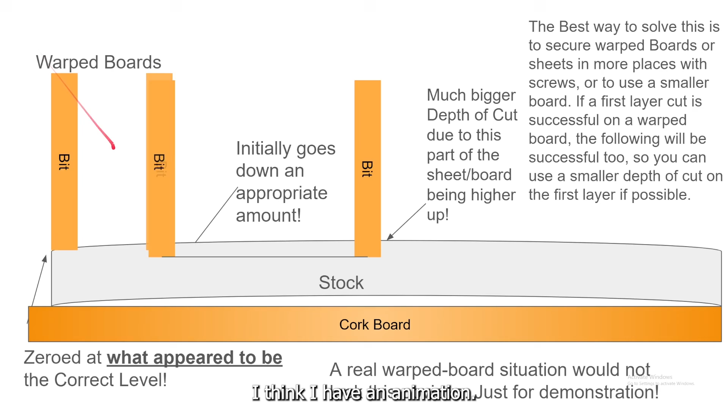So this is kind of a weird concept, but if this bit goes across, let's just say for sake of argument, this bit goes across this entire part flat. That means there will be no more warps in the areas it's going to be cutting down. So although this is up high right now, it will always be leveled to this line. A real warped board situation would not look this obvious, this is just for demonstration. I think I have an animation - yeah, you can see how over time it shifts the amount that it is cutting.

But some other problems I've run into: hitting screws will always break a bit. Just don't put a screw in the path of the bit. That seems kind of silly, but if you're really worried about it, I'd recommend putting your 0 point really high at first, having it go around and making sure it doesn't hit a screw. You don't always have to do it, but especially if you're working with very small stock, like an expensive piece of wood that you only have a little bit of, it's all good.

The stock is the same size in the CNC and in Fusion, but it is not going through. Try setting your 0 a little bit lower than before and retry the cut. This could just be small measurement errors. It's fine, but for wood, it may just chip out. For aluminum, you may just have to go lower. It's nothing big, like I said before, it won't have a giant problem with cutting unless it's warped.

The aluminum is welding. There are plenty of causes for this, but immediately try turning down the depth of cut, movement speed, or unscrew the valve for the sprayer slightly.

Make sure to aim the sprayer at the very tip of the bit. If you aim it too high, the heat will not transfer as well. The main thing with the alcohol sprayer is not just spraying on the tip, it's also spraying on the part that it's cutting. So spraying it directly on the tip is by far the best option.

If the CNC is cutting way too high or off the stock, even though you zeroed it correctly, that means your axis origin needs to be on top of the corner of the material. This is how the axis origin looks in Fusion. If it's going too high, one possibility is that you've placed the axis origin on the bottom corner. I did this a lot when I was first starting off. You want to have it at the top corner rather than the bottom corner. If you start at the bottom, the CNC will think it needs to go up to cut out, but no.

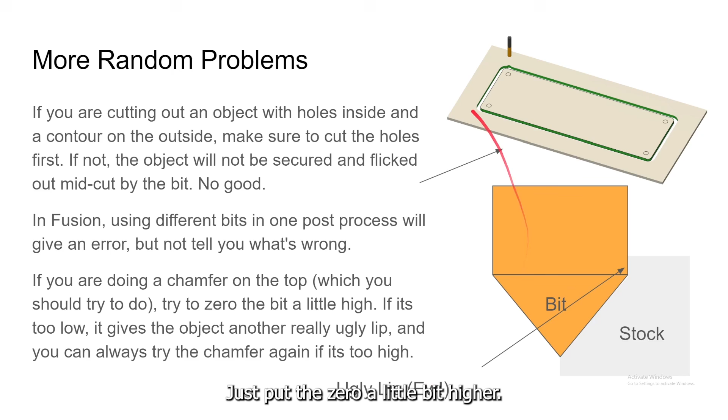Of course, you'll find problems on your own. My default for finding out what's causing a problem on the CNC is to turn down the depth of cut. When I refer to depth of cut, I'm actually referring to the maximum roughing step down, but depth of cut is just the simple name for it. Generally it's kind of hard to do research, but if you have a problem with Fusion in particular versus the CNC, you'll find it pretty easy to find answers. If you're looking for answers on the CNC itself, like the Omio, it's much harder to find answers, but you can always talk to one of the higher-ups, the head of manufacturing, or me, or whoever. And just generally, don't cut corners.

Seems very simple, but this has made me break the most bits by far. This could either be in pursuit of finding a way to make it faster, or just simply cutting corners. It will either give you bad pieces that you can't really use, pieces that will break your bit, pieces that are sharp and can cut you, like I've experienced before, and can even break the motor of the CNC itself. But that's all.